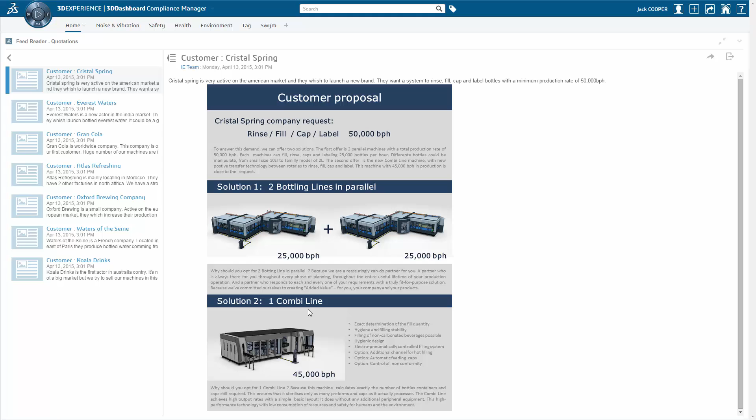The second is only one combi line with a capacity of 45,000 bottles per hour. This solution is very competitive price-wise, but does not exactly meet the customer's requirement. The question he asks himself is, can he make his offer more competitive by increasing the capacity of the existing combi line by 10% so that it meets the customer's requirement?

One click on the compass allows him to display all the ideas currently being studied in his company. This new ideation process is an easy and social way to mature and qualify innovative ideas. All actors can voice their needs and ideas and provide each other with their feedback. And one of them is related to increasing the combi line's production capacity.

To ensure that this idea is feasible, he contacts François, the product manager. François, with the help of his design manager, proposes to boost the rotation speed of the carousels to reach 50,000 bottles per hour. But this speed may not be tolerated by all the machine's components.

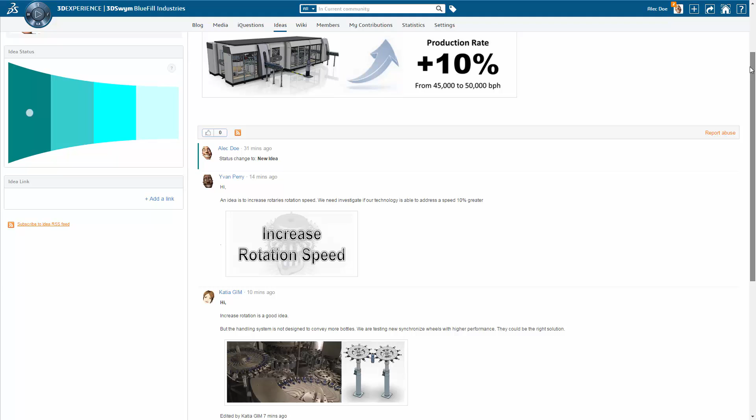They need to identify the parts that will limit the line's performance. Julien worries this analysis will take too long and that he won't be able to provide his customer with the best solution. François reassures him that thanks to the 3DEXPERIENCE platform, he'll receive a response upon his arrival. Confident, Julien flies off to meet his client.

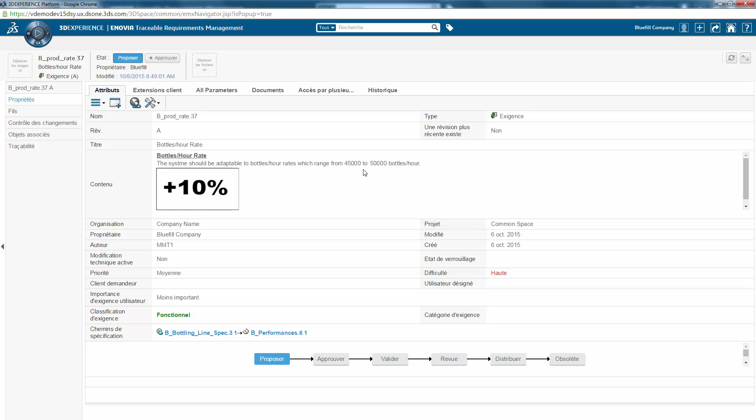Let's see how the 3DEXPERIENCE platform brings an innovative way to study and manage design changes. We begin with Josephine, responsible for machine design. She retrieves Julien's requirement among all product requirements and starts with a functional analysis.

Here we see the definition of the machine's major functions. Each function is designed to satisfy a group of requirements. For example, this function is composed of several sub-functions that represent the different operations the machine must perform: rinse bottles, fill, cap, and label them.

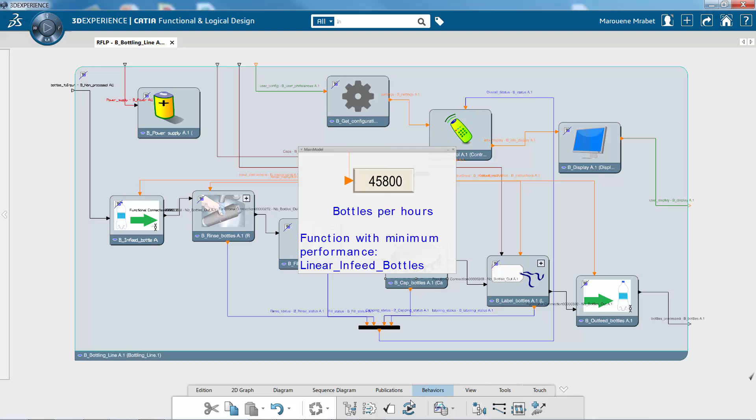Josephine simulates the behavior of all these functions in order to check the theoretical performance of the machine and to understand which system is the most limiting. The result indicates that the function linear in-feed bottles does not allow a pace higher than 45,800 bottles per hour.

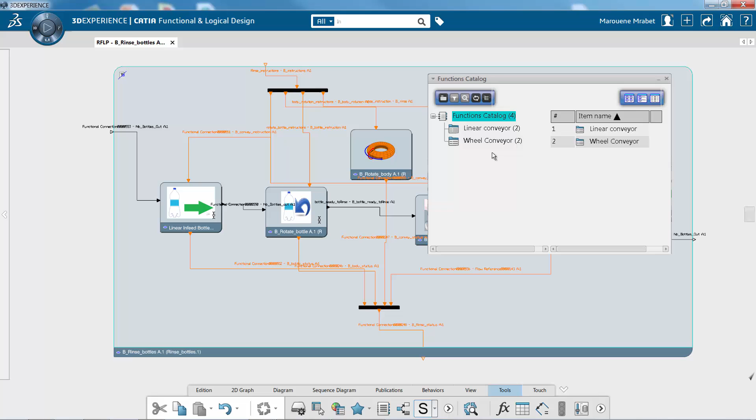Josephine will replace this linear bottle handling function with a new one which handles bottles using a rotating mechanism. Thanks to a catalogue of approved functions, she's able to replace this one by another more powerful one.

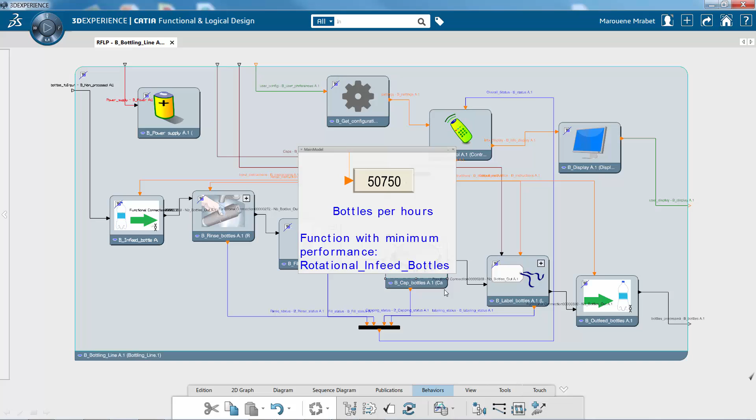She reruns the simulation to see the new machine capacity. The result is above 50,000 bottles per hour, which is in line with the request. Josephine's simulation proves that she could launch the design change for this standard machine.

Let's go back a few months when the machine was designed using the 3DEXPERIENCE platform. It began with Yves, the chief mechanical designer, whose role was to define the layout of the machine.

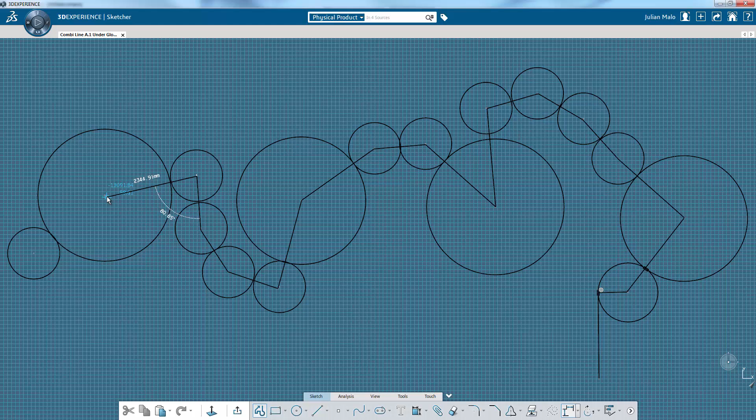For this project, a new technology for handling bottles was developed. Synchronized wheels instead of conveyor belts between rotaries were used to avoid bottle congestion and to drastically improve performance. As you can see, thanks to an intelligent design, Yves optimized the way the machine rinses, fills, caps, and labels bottles.

Due to the complexity of this type of product, Yves works in collaboration with his colleagues like Issam. They're discussing which parts could be reused. Their modular design approach maximizes reuse of existing parts.

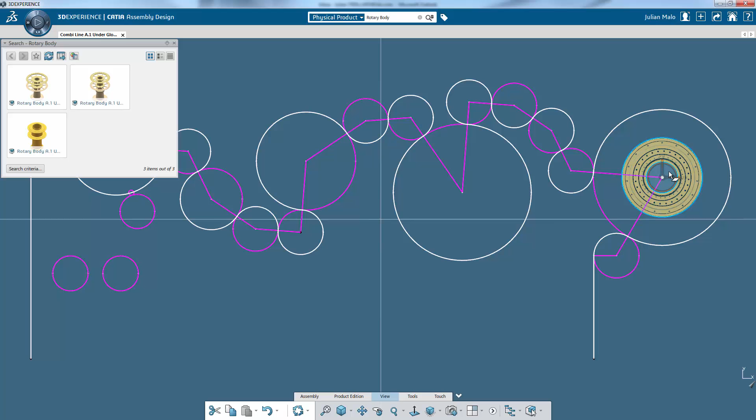Design time is drastically reduced and the quality is improved. Advanced research tools simplify the retrieval of components. They're positioned by dragging and dropping them on the previously defined skeleton.

In parallel, Issam works on more specific parts, such as the rinse module, which we see here.

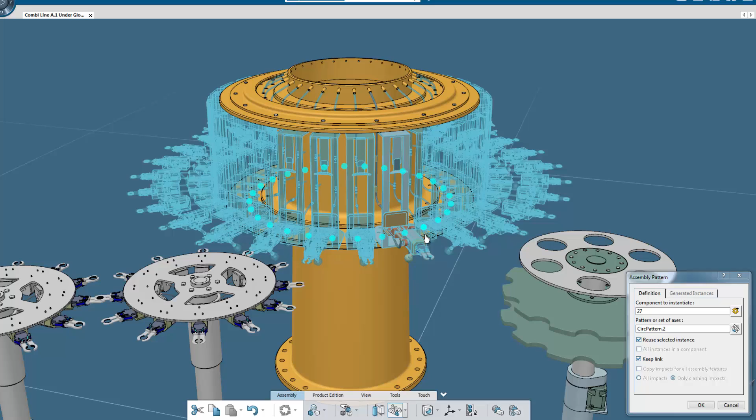By working concurrently on the same 3D digital mock-up, they were able to create this new combi line.

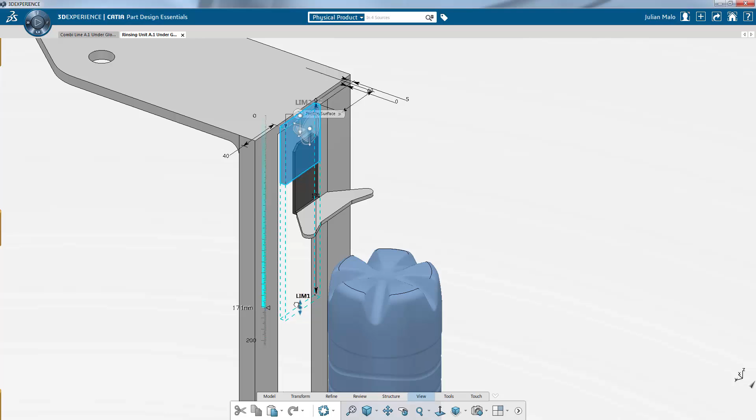Let's come back to the present now to see how the change requested by Julian will be taken into account. To deal with the higher rotational speed of the rotary, Issam will need to make some adjustments. For instance, he adds a protection on the rinse module to prevent bottles from being ejected during handling. In parallel, Yves replaces the linear conveyor module by a rotational wheel module.

By chatting in his working session, Issam informs Yves that the new rinse module is now available. Thanks to the 3D Experience platform, they're able to share their data and discuss more details over the phone. Issam manipulates the model remotely, while Yves understands the behavior and verifies the kinematics in the context of the adjacent modules.

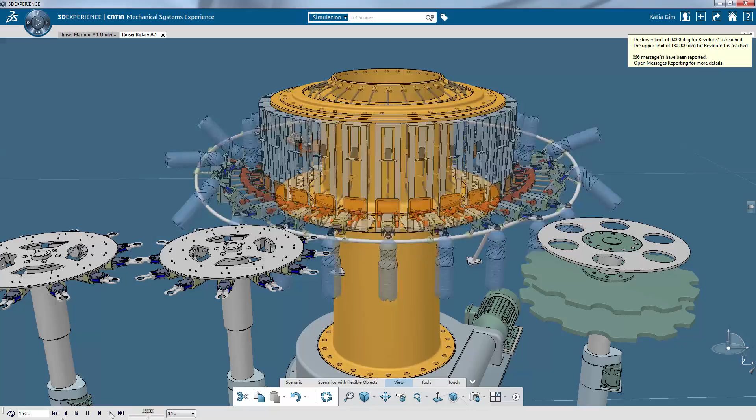The design change is therefore done with a minimum number of operations, and it's now time to validate the behavior of this machine.

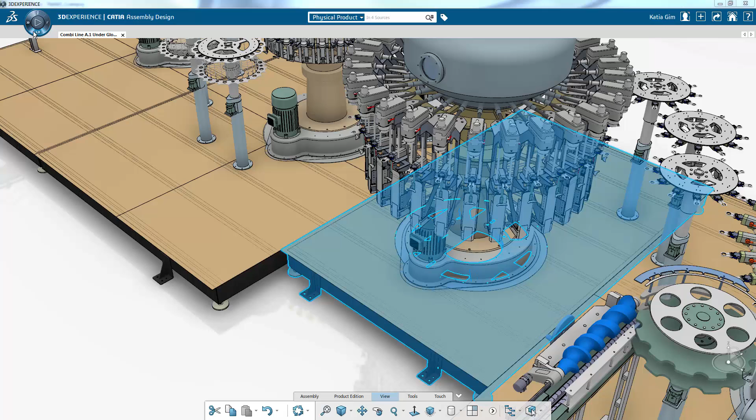This is Lening's job, the simulation engineer. His first task is to check that the framework supports the rotary loads under all types of conditions. With the east quadrant of the compass, he accesses the finite element analysis applications and validates that the structure is strong enough. As you can see, there are no boundaries between the engineers and the analysts, as they're all working with the same data.

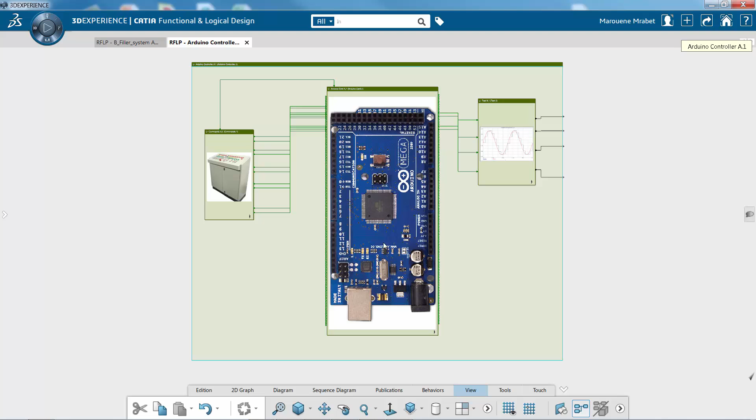Lening must also ensure that all components are well synchronized. The behavior of all hydraulic and electrical devices has been modeled. He can launch the simulation of the controller and verify the result. The real controller of the machine can be connected to the digital mock-up. Lening can thus validate the real behavior on a virtual model, which accelerates validation of the commissioning phase earlier in the development phase.

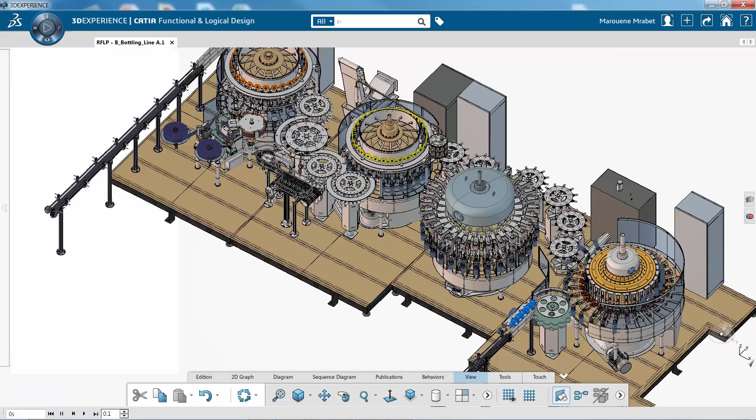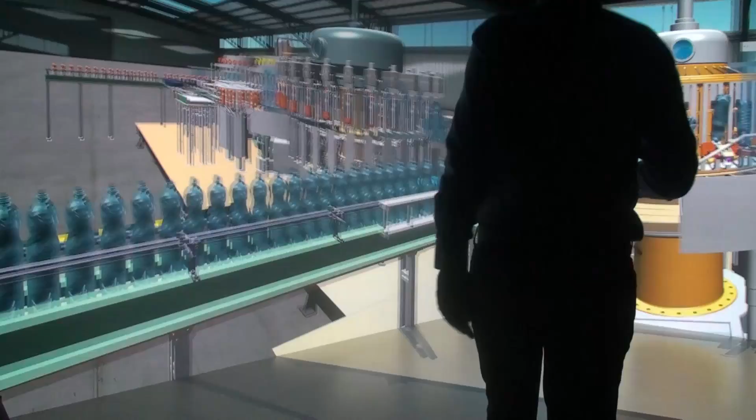In an immersive environment, the product manager visualizes the machine in real scale and can identify potential malfunctions.

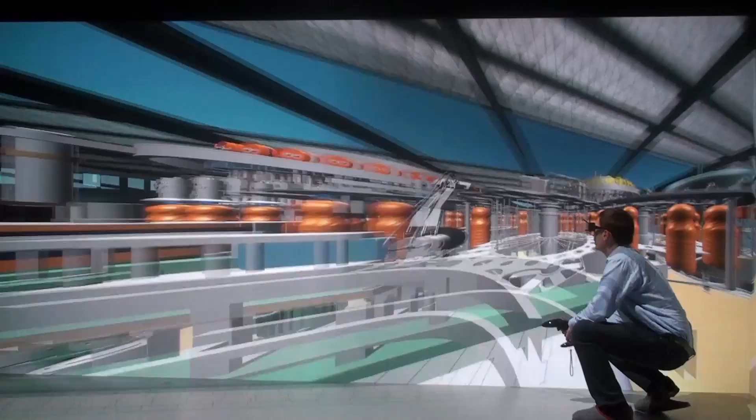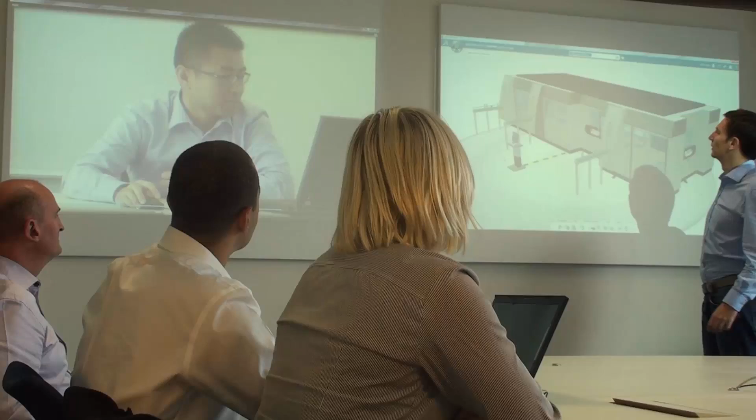In the meantime, Julien is now about to reach his destination. A final design review between all stakeholders will enable them to certify all design changes. Navigating using turntables allows them to visualize in detail all the machine's parts.

Lening, who's located in China, can interact in real time with his colleagues from the Paris office. All actors view and understand each detail. Color coding indicates different information, like which parts are reused or not, where the interferences are, or to compare changes. This helps them make the right decisions.

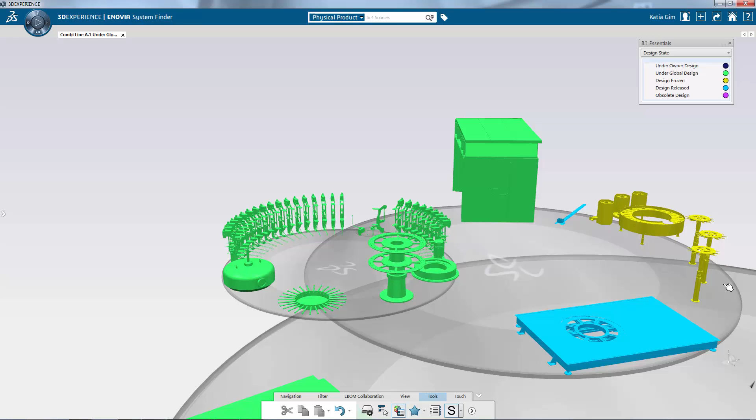Satisfied with their work, they decide to put this new version of the combi line for sale. Julien is notified upon his arrival that he can now propose this new version to his client.

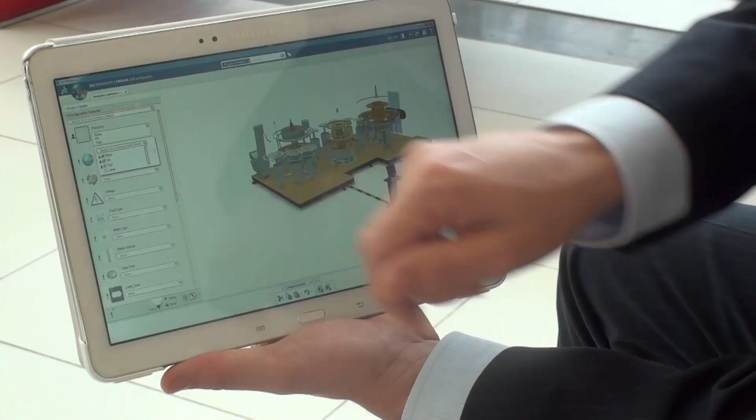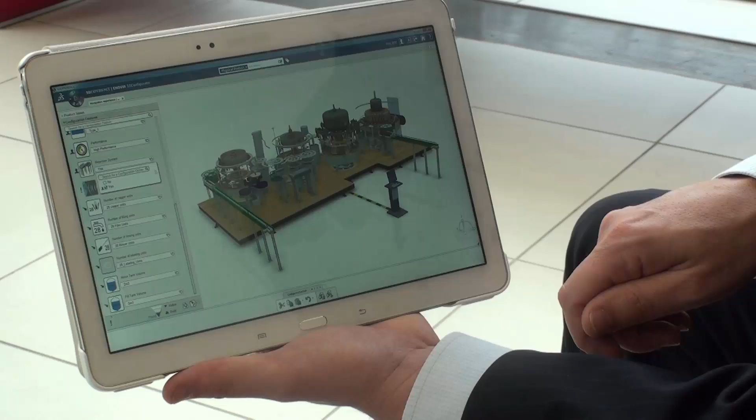Philippe is very impressed, and even more so as he himself can change the options in real time. The discussion between the vendor and buyer is simplified. They're speaking the same language, with 3D to support them during their discussion.

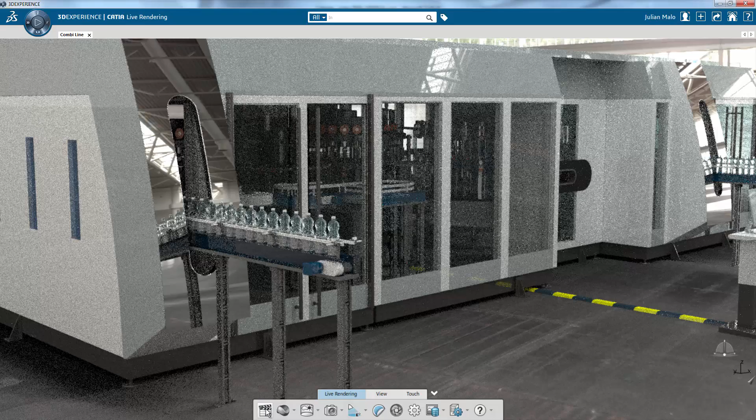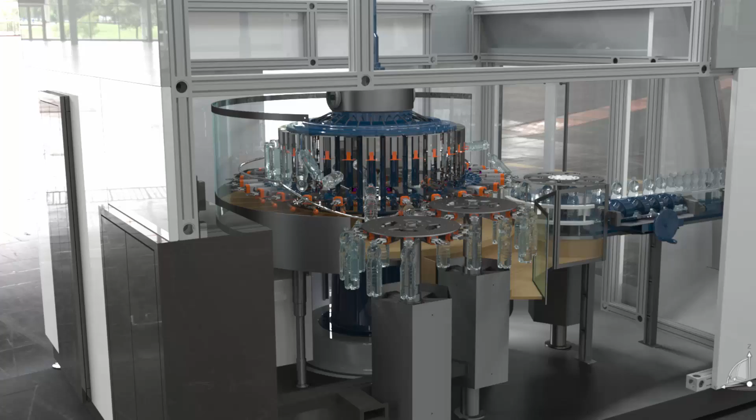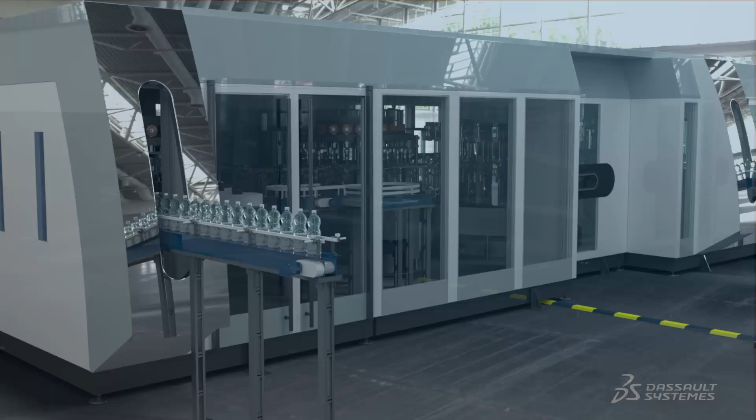In this journey, we've seen how easy it is to do business in the age of experience by connecting all stakeholders of the company, from sales to engineering, and enabling them to collaborate in real time on the 3D Experience platform across the globe. The 3D Experience platform definitely allows you to simplify and accelerate your business.